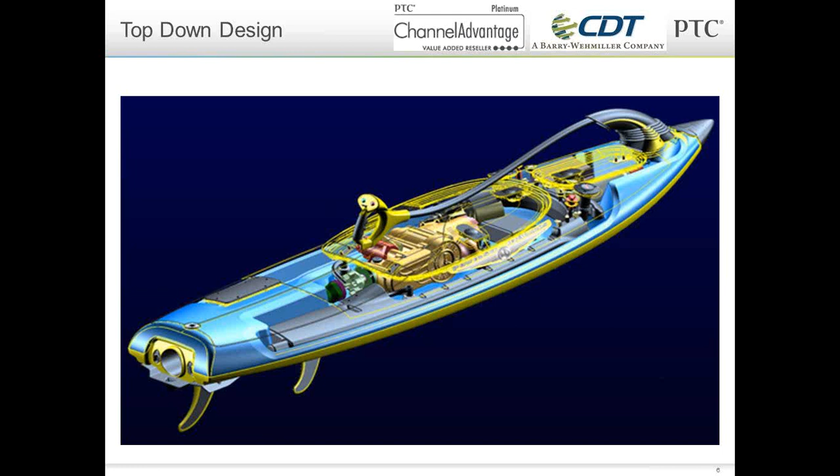Okay, so let's start by talking about top-down design. This is a perfect example. This little powered, I don't know if you would consider it a kayak or a ski board or a combination of the two. Looks like they took a kayak and turned it into something else almost. But this would be a very good example of something that you might use top-down design on.

With a lot of bottom-up design approaches, that is not the case. Let's say the other extreme would be working with Legos. I've got a 4-year-old and a 1-year-old son, so there's lots and lots of Legos around the house. When they're building a house out of Legos, where the roof is going to be is very dependent on how many stacks of blocks you put in.

Using a top-down design, however, I could specify a location where the roof would be and a location where the walls are, and I wouldn't have to know if I'm putting a green block or a blue block or any of that information at the time of designing the walls. I can do that later when I get to that portion of it. So it really has an emphasis on planning and a complete understanding of the system before you get into the small details.

Another really cool thing that top-down design allows us to do typically is it allows us to break a large assembly or a large design into separate smaller pieces that we can dole out to different teams. So in the case of the lawnmower, I might have one team working on the deck, one team working on the seat mounting portion, one on the frame, and then another team working on the engine and the transmission.

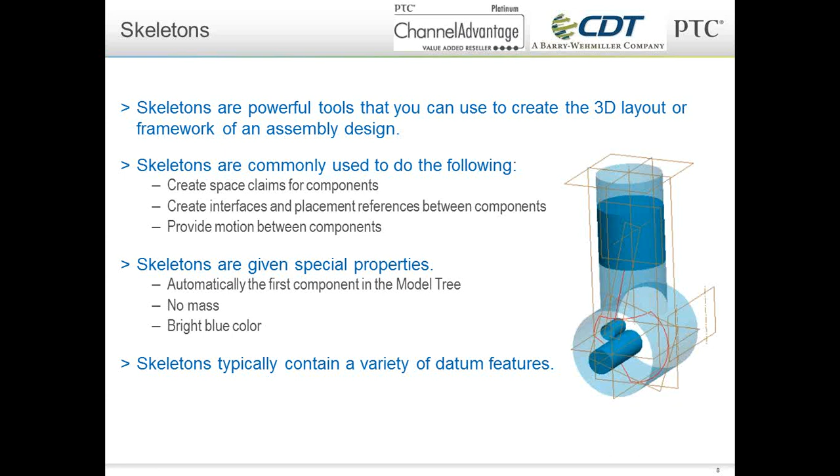Now you notice that there's a lighter blue associated with the skeleton defining the block. In this case, that's because it was actually given some transparency, so you can kind of see through it. And like it says down here below, skeletons are typically defined using different datum features, and a lot of times you'll see that they're not even solid geometry, they're just surfaces. So these 2 diagrams really show one of the most beneficial parts of skeletons here.

If you notice, on the left would be a traditional assembly. I've got, let's say, my piston, my rod, my crankshaft, and my block, A, B, C, and D. I've got component D and component C that are assembled to component B, which is assembled to component A. At any time, if I decide I needed a drastic overhaul of component B, or maybe delete it entirely, I wouldn't be able to do that without breaking some references.

Now, the cool thing about skeletons is it assembles everything to the skeleton. So if you look on the right, you'll notice that A, B, C, and D are all assembled to the skeleton and not to each other. So now I can complete one of these portions and not wait for the input from a different member of my team, and if someone makes a design change, then I don't have to worry about my portion of the design suddenly being moved to the wrong location or something like that.

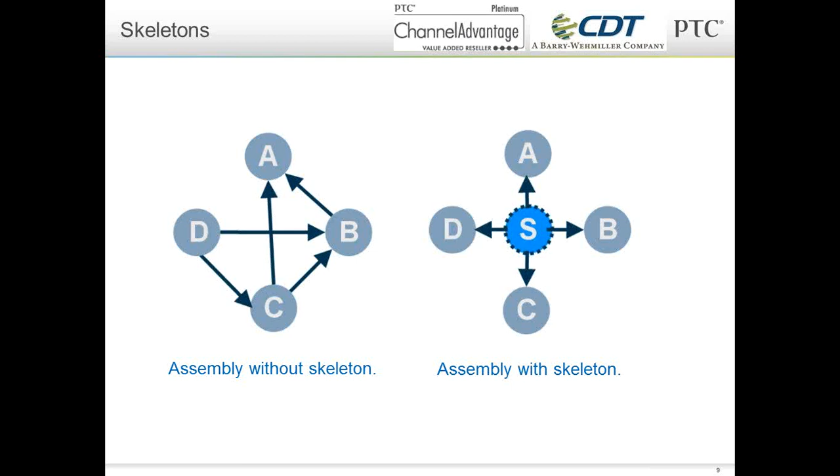Another little analogy I've heard is to think of a skeleton like a Christmas tree, and your design being all the ornaments and the Christmas lights that are on the Christmas tree. I don't have to assemble the ornaments to each other, even though I technically could, or the tinsel or whatever. The tree itself holds up all those ornaments. I can remove any of those ornaments without worrying about the other ornaments not being constrained properly.

So here's what we're on to now, the actual demonstration. We've gotten a lot of feedback from you guys in the past, and the one thing that's common is most people don't like the talking so much as the actual presenting of the software. So let's flip over to Creo Parametric here. And one thing I will note is that very little has changed in the Advanced Assembly extension between Creo 1 and Creo 2. So even though I did parts 1 and 2 of this Advanced Assembly extension using Creo Parametric 1.0, everything should work almost exactly the same in Creo 2.0.

So if you were looking to see what's changed from Creo 1 to Creo 2, I'll just tell you right now, not very much at all. So the first thing we're going to do is we're going to start and actually create an assembly using a top-down design approach. So let me first go in and we'll set my working directory to a location here that will allow me to create a few things. I'll make sure I'll start with a fresh slate.

So the first thing I'm going to do is I'm going to create a new assembly, and I'm going to name that assembly drill. I'm going to create a real simple drill. And we'll design this guy in millimeter kilograms. And you'll notice as soon as I start this, my model tree has nothing in it except for drill.assembly. I can turn on the tree filters. You can see that I've got some planes and a coordinate system that are in there, but those are really not going to be used a whole lot for us right now, so I'm actually going to turn those datum features off, which will allow us to see just the components and the other features that I add to this assembly.

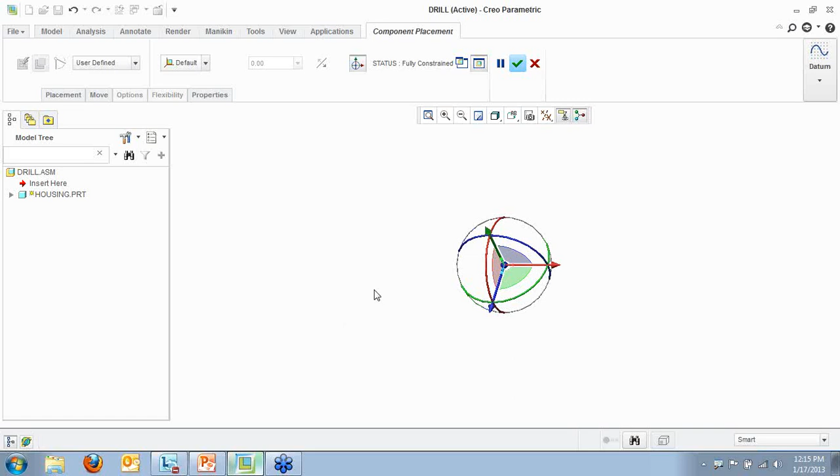So as soon as I drop that in, I right-clicked in the graphics window and picked the default constraint. You'll see that put a default constraint in here, which, as we all probably know, assembles the coordinate system of the assembly to the coordinate system of the component that I just inserted into the assembly. If I turn my planes on, you'll see I've got one component inside of this assembly. Then also within inside of this assembly, I want to insert several other components as well.

Let's say this time I'm going to do a sub-assembly, and we'll call this drivetrain. Because this drivetrain subassembly is going to contain all of the components, the motor and the gearbox and the chuck and that sort of thing. And I'm going to click OK. This time, however, I'm going to have to browse over to my assembly there, and instead of actually placing the component, because this component hasn't been defined yet, I'm going to leave this component unplaced.

Now notice when I do that, and I'm going to zoom in and show you a little bit closer view of it here, that housing and drivetrain, even though they're both technically an empty part and an empty assembly, they have different icons associated with them. So I can look at my drill.assembly, and I can see housing part I created. It is assembled. It is placed in the assembly. Whereas drivetrain I also created, but it's got a different icon associated with it to designate that it is not actually assembled, or it's not actually placed into the assembly.

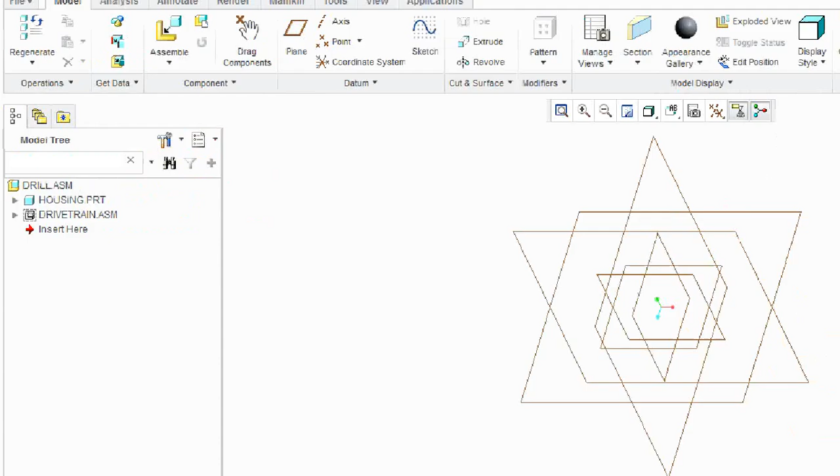Then one thing I'm going to do is I'm going to also create a trigger mechanism for this. So we're going to actually create this as a shortcut. We're going to say trigger and create this as one single part. We'll also leave this component unplaced.

And let's say that I need also to include a battery on this. So in this case, I've already got a battery that's designed somewhere, but I don't want to place it yet, so instead of creating a new component, I'm going to go to the drop-down under Assemble, and I'm going to say Include. In this case, I have a battery pack that is located in this next folder over here, and when I do that, it drops the battery in the same way, unplaced in the assembly.

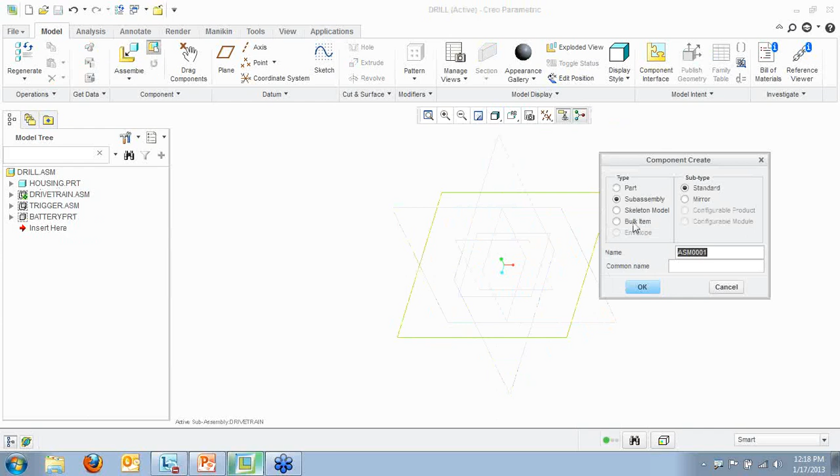Well, you're saying, oh, inside the drivetrain, I've probably got several components. I don't have to open an empty drivetrain assembly and insert several components there. I can simply grab that drivetrain assembly and activate it and create those components in there. So let's say inside of that drivetrain, I'm going to have a motor.

Also leave that component unplaced. We'll browse over to the part file there. And then if you expand this out, you can see I've got a motor inside of there. I'm going to also place, let's say, a sub-assembly of a gearbox inside of there as well. Then I'm going to place a sub-assembly for the chuck.

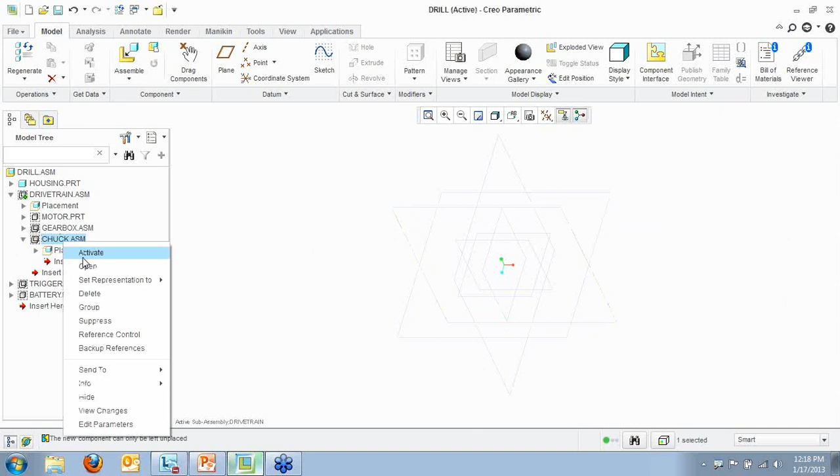And then I can go even further into that. I can activate chuck assembly, and I can go in and go as far as to insert components inside of there. So, chuck collar. Oops. And don't worry, I'm not going to go as far as to create an entire large complicated assembly, but this is just to show you how I can quickly and easily, we'll go back and activate our base assembly, create the entire assembly of an entire component here using this.

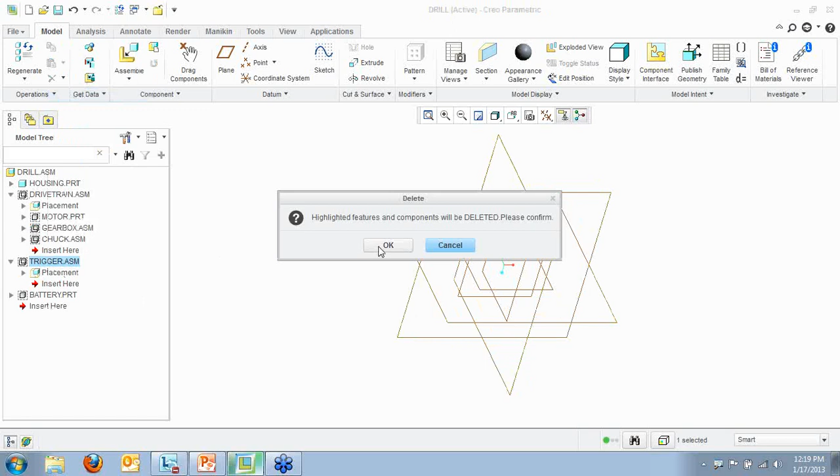And I messed up the trigger, so we need to actually delete that. We'll actually create a trigger.part. So part this time. Part, leave component unplaced. So the first thing we're going to do once we've created this entire system is now, since we're talking about skeletons, we're going to go back and create a skeleton to give us those placement space claims and the placement references where we're going to assemble things to. We're going to define all of that using our skeleton.

So the first thing I'm going to do here is go and create, and this time instead of creating a part or an assembly, I'm going to pick a skeleton model, a standard skeleton model, and we're going to label this one drill_SKEL. And you'll find most of the time people consider this to be good working practice, that when I use a skeleton part or skeleton sub-assembly, motion skeletons or standard skeletons, you use the same terminology of the components you're basing the skeleton off of, but you make sure and put an _SKEL, which allows you to quickly and easily, from looking at your model tree, determine which of those components is the skeleton. So I'm going to say drill_SKEL, and I'm going to click OK.

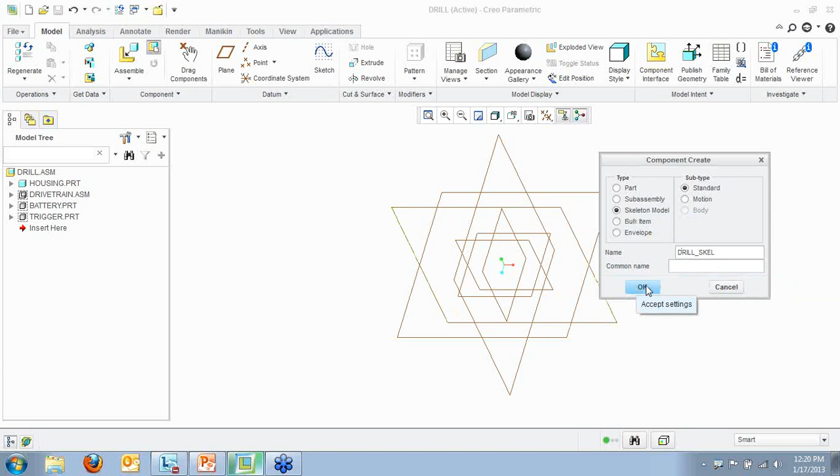And it's going to ask me how I want to place this and all of that information. Again, I'm going to do a millimeter kilogram second part.prt. And notice that it placed my drill skeleton right directly at the top of my model tree. Even though I already created things, the skeleton parts are always going to be at the top. When I expand this out, you'll see there's nothing inside of it. I'm going to actually open this in another window and create the base for this drill.

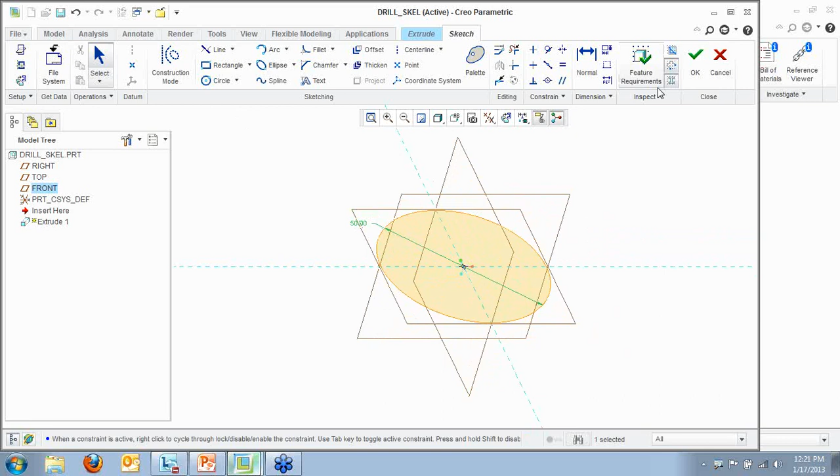And we're going to do that using traditional modeling features, only instead of using solids, I'm going to use a lot of surfaces instead. So I'm going to first click extrude, and I'm going to extrude from the front plane here, and I'm going to put a simple circle of diameter 50 millimeters. I want to complete my sketch, and you'll notice it automatically toggled to a solid. In this case, I want to make it a surface. And I want to extrude 100 millimeters in one direction, and I want to go to side two and extrude 50 millimeters in the opposite direction. Notice the blue color indicating this is a skeleton part.

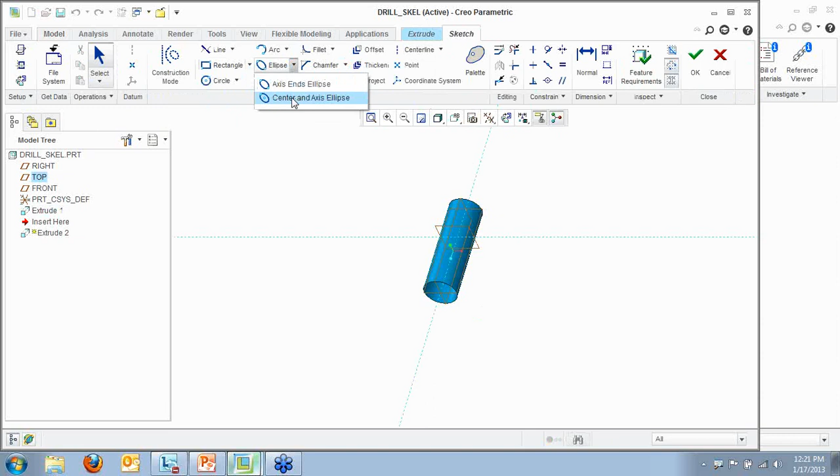Next, I'm going to add another extrude. This time we're going to extrude from the top plane instead, and I'm going to use our handy-dandy center and axis ellipse tool to start from the center, and we'll say 45 millimeters long by 25 millimeters wide. So that'll give us a nice, somewhat ergonomic grip. Again, toggle this to a surface. I'm going to flip the direction the other way, and in this case, I want it to go 100 millimeters.

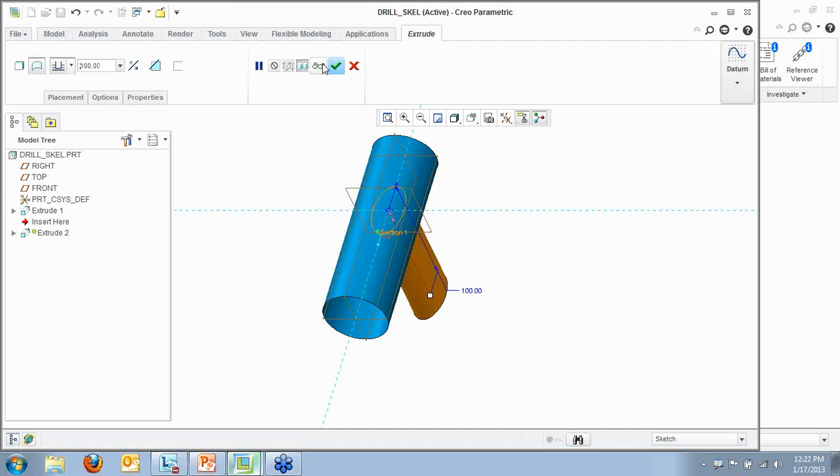While I'm in here, you'll notice that I've got two things. I've got these two surfaces that are intersecting with each other, and to show you a little something slightly off topic but very much related, I want to take these two quilts. So I'm going to select both extrude 1 and extrude 2, and I want to merge them together. When I merge them together, it's going to ask me which sides I want to keep, so I want to flip my arrows to designate the two different sides that I want to keep.

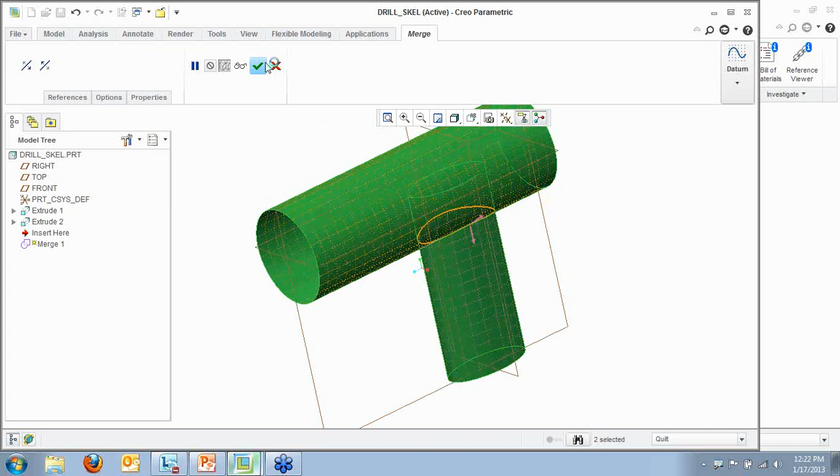I can also do that up here with the arrows here. Notice when I get the orange wireframe, or I guess the orange almost shading grid on the parts that I want, then I will complete the feature. You'll notice that now it trimmed out the other portions of that, and now this is one quilt that can be selected as an entire single quilt.

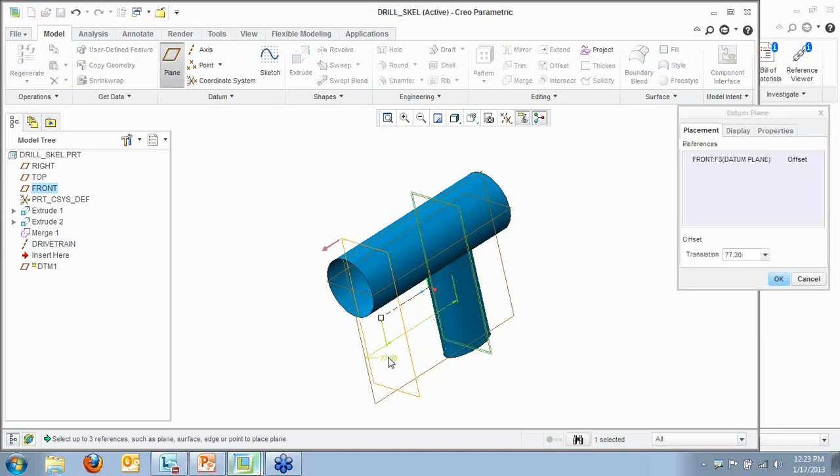Well, there's a few other things I want to do in here: I'm going to create placement references. First of all, I want to create an axis that goes through the center of this quilt, and I want to name this drivetrain, because that is going to be the axis that I'm going to assemble my drivetrain to. Maybe I want to put a plane offset from this out, we'll say 75 millimeters, and I will label that plane chuck, because that's what I'm going to assemble my chuck to.

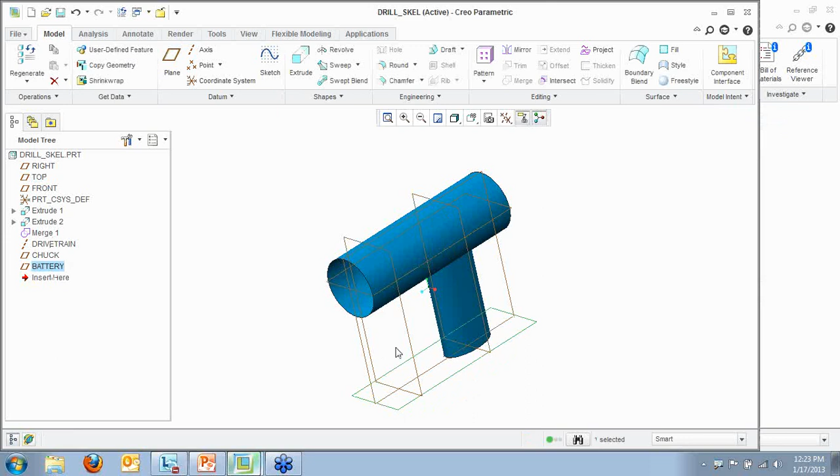Then maybe I want to put another plane down from the bottom. Let's see, we'll go from the top plane down 100 millimeters, and we'll label this one battery. And that's going to allow me to have a reference to assemble my battery to. We won't go and actually assemble the entire drill and create an entire drill from scratch. We only have an hour, so obviously that's probably not realistic in this time frame. What we do want to do is focus on the trigger.

So we're going to put an axis in, and with that datum axis tool selected, I'm going to also create a plane offset from this top plane down 50 millimeters, so I'll say minus 50, and I'm going to put my trigger axis through there and through this plane here as well. And we're going to label this one trigger.

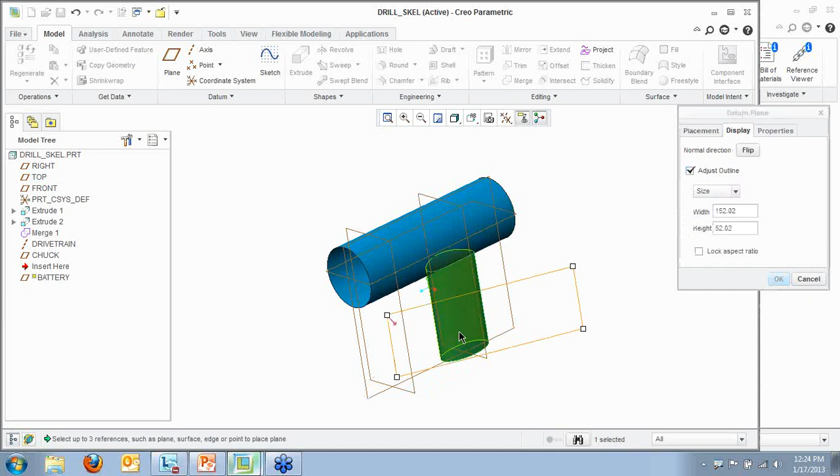And let's change some of these around. Maybe I'm going to grab that battery, and I want to edit the outline of this battery. Oops, let's see here. Adjust the outline, not off of size, but off of reference. Now let's cancel out. I just made a mistake there, so don't do that. I'm going to edit the definition. I'm going to go to my display. I'm going to adjust the outline based off of a reference, and for my reference, I'm going to pick this surface. We'll hold down Control.

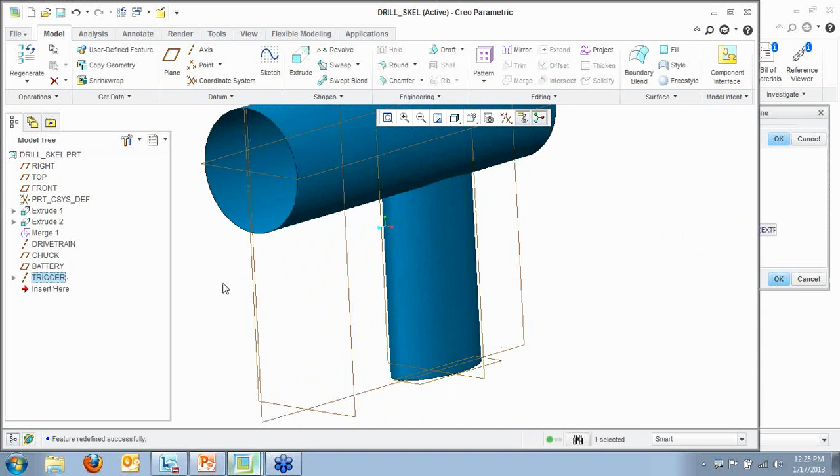Maybe that's as far as I want that to go through there. Or my trigger, I don't want it to be through the entire part. So let's turn on our axes here. I want my trigger only to be through that portion of the assembly. So I can edit the definition of the trigger, display, adjust the outline based off of a reference, and I'm going to pick that same reference there.

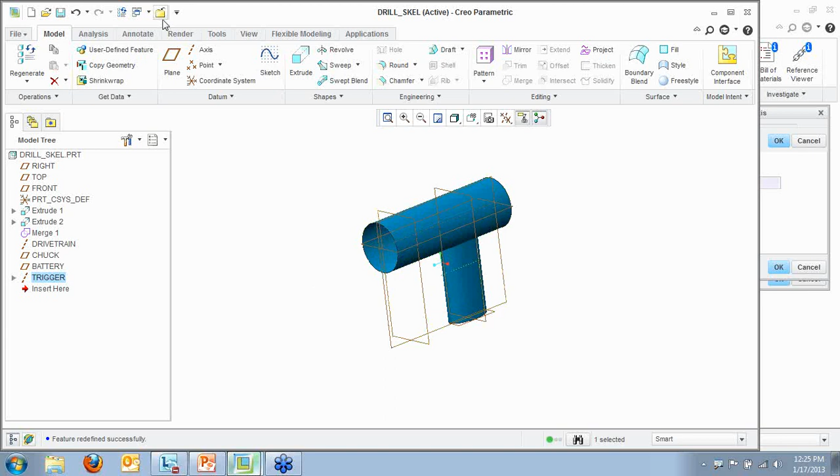Again, tips and tricks. We try to show you a few cool little things spread throughout, so that if you're not necessarily interested in skeletons, you might still be able to learn a couple of other things. So now I'm going to have those things that I can come in and assemble there. Let's save this guy and close out of here, and you'll notice that now I've got the skeleton that I created located inside my drill assembly.

Well, I want to also create a trigger on this, and I'm going to show you two different things we can do here: one being where I take an existing model and create a skeleton from that, and then how to take a skeleton and create a model from that. So we're going to do something that doesn't logistically make sense in this specific application.

I'm going to create some geometry. I'm going to create a skeleton from that geometry, and then I'm going to use that skeleton to actually generate part geometry. So I'm kind of taking the long way around to show you two steps. Just note that this isn't necessarily realistic of the way that you would do this in the real world, but I want to show you two pieces of functionality built into one.

So the first thing I'm going to do is go in and create a new part, and we're going to call this part trigger_geometry. I don't want to use the part template; I want to use my millimeter again. Here I'm going to create a couple things. First of all, we know that we need an axis for our trigger, and we need the geometry to actually create the trigger. So I'm going to first drop an axis at the intersection between the right plane and the top plane. We're going to name that axis trigger.

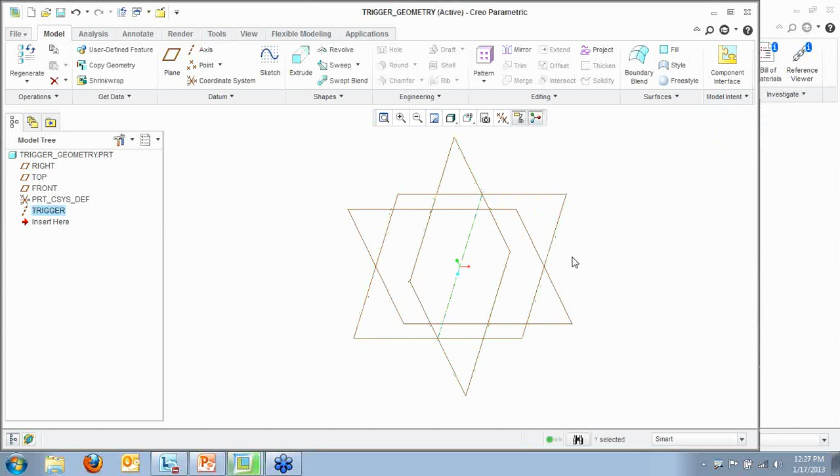And then I'm also going to create an extrusion on the right plane. In that case, it actually turned the wrong way, so I'm going to hold down Control and rotate this 90 degrees to the right.

Just to verify that this all popped in correctly, let me turn my planes off for a second, and let me make sure my axes are turned on. I'm going to pick trigger axis to make sure—there it is, it's horizontal, that's the way I want it to be.

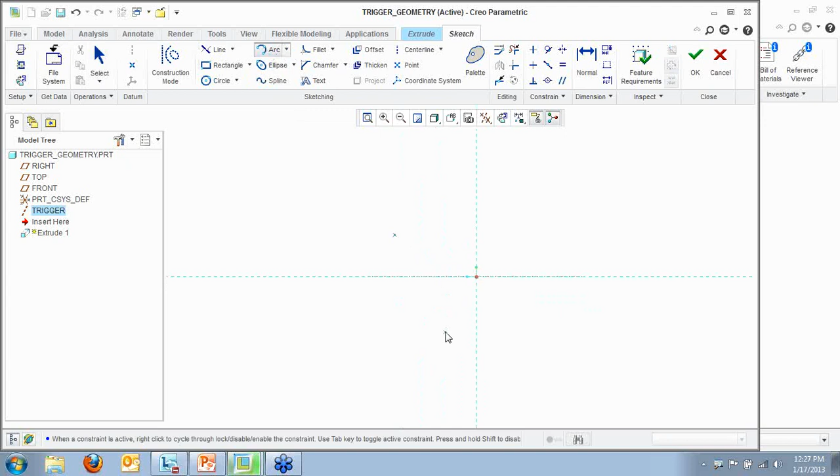And I'm going to create some geometry, just a simple 3-point arc. We'll start here, come down to about here, and we'll make it about like that.

Now, I made it in millimeters. This is 77 millimeters off of the front plane. That's probably not desirable, but I'm going to show you another little trick here.

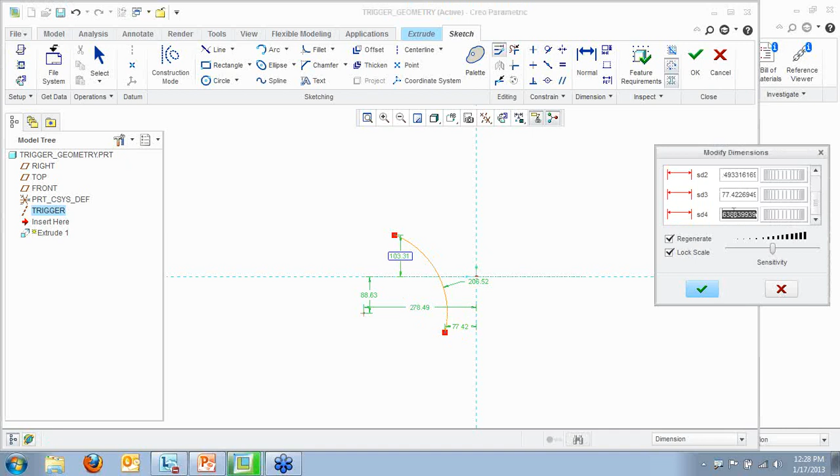I'm going to select all of the geometry, go up to my Modify tool, and check the box that says Lock Scale. Then I'm going to come in and say, for example, I want this top dimension here—if I scroll up, I should see it highlighted right there. I want that SD4, in this case, to be 25.4 millimeters off of the horizontal. Notice how it rescaled everything for me.

So just like we always know, sometimes when you drop that first sketch in, it comes in as 1,000 millimeters instead of 4 millimeters like you're wanting it to be. We can use that Modify Dimension tool to rescale things appropriately.

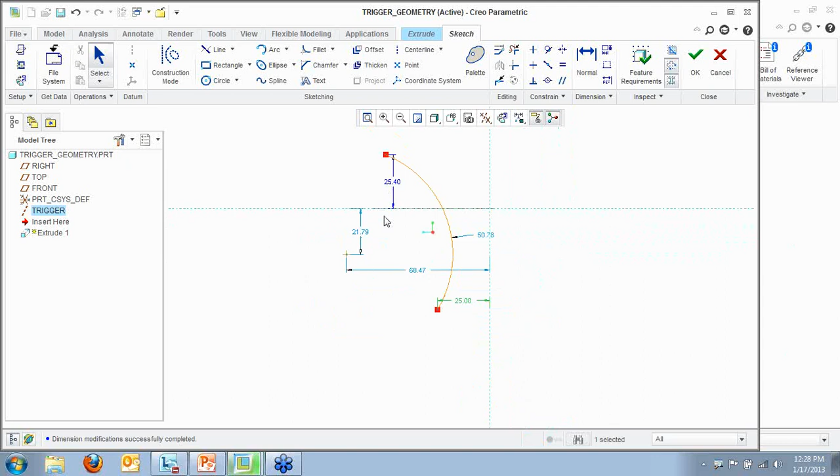And now I can come in and tweak these individual dimensions a little bit. Maybe I want this one to be not 19, but we'll say 25. And we want this other dimension here to be 75.

That's close enough, and here's another little trick I'll show you. Because under my extrusion I have this currently selected as a solid, when I complete a sketch that does not contain a closed loop, if I go to my feature requirements, you'll notice not all ends have been explicitly defined.

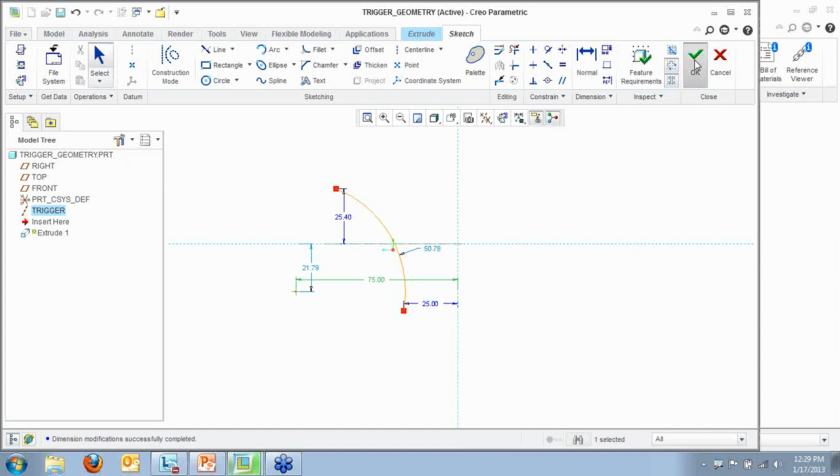When I complete this sketch, I'm going to get a warning: there is no solid geometry in the model to intersect with this feature, therefore the sketch must be closed. If you continue, the feature type will automatically be changed to surface. In this case, I want a surface, so that's what I want—I'm going to click OK.

If maybe I wanted to do a thickened instead, I could toggle that back to a solid, and it would automatically toggle to a thickened—let's say 3 millimeters thick.

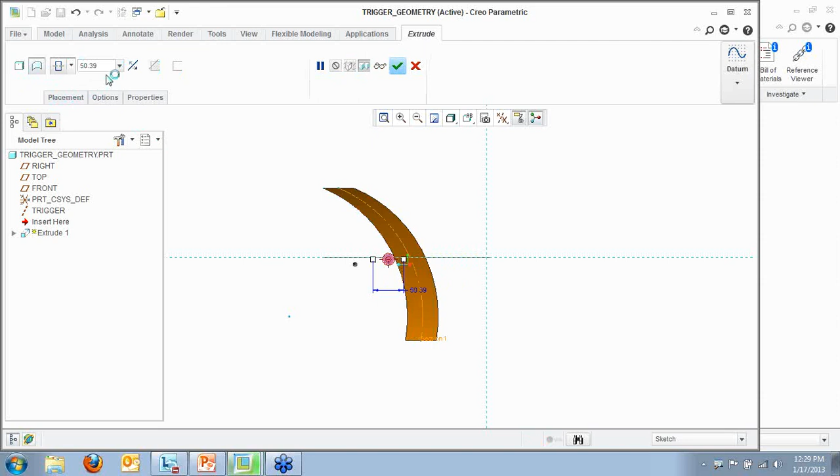But in this case, I actually do want it to be a surface, and I'm going to do a symmetric extrusion of 25 millimeters wide, and that's going to be the geometry I'm going to use to create my sketch. I'm going to click OK, and you'll notice I have a purple surface.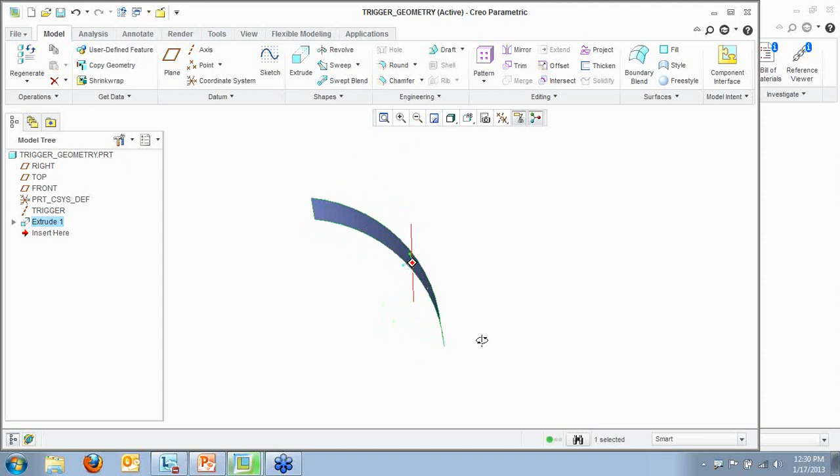Again, in Creo, since Creo 1 came out, surfaces and solids show up in different colors. Solids show up as gray, like we're used to. Surfaces and quilts show up as this kind of purplish—I guess my wife would call it periwinkle. I'm not good with colors, just like most guys aren't.

But I can tell right away this is a surface. So now this is the geometry I'm going to use to create my trigger. I'm going to save this, and I'm going to close it.

And I'm going to do something that I don't know if a lot of people would consider good practice or bad practice, but I'm going to have to change a configuration option. I'm going to insert multiple skeletons inside of this assembly. This is a simple enough component that I probably wouldn't need to do this in the real world, but just to show you how to do this, I will go ahead and do it.

And for very large assemblies, which I'll show you one here in a little bit, multiple skeletons within an assembly will be very, very valuable to you.

So you want to go to your File, Options, and under your Configuration Settings, when this pulls up here in just a second...

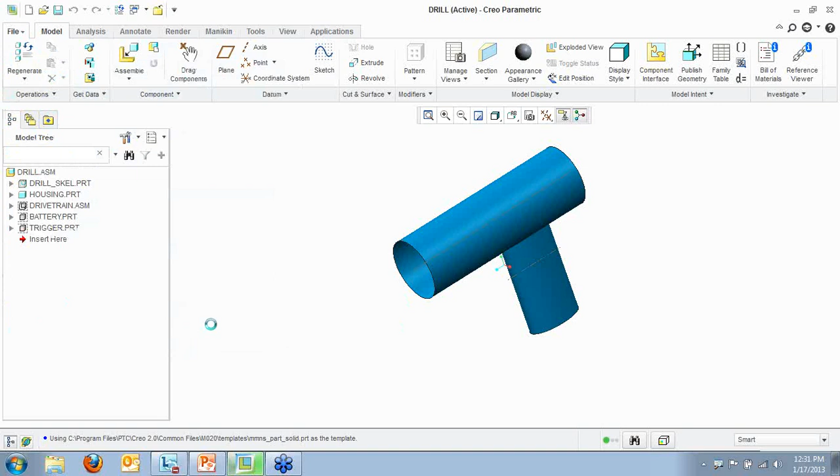Oh, no. Okay, so that's never happened to anyone else before, has it?

Okay, so let's go in and we'll open this guy back up again. It wouldn't be a good demo unless we crashed Creo at least once.

So let's retrieve this, and fortunately, let's see if I actually go back to my favorites. I did not save that assembly. So let's go in, and fortunately I do have another one located here that is completed. Notice when I try to open it, I get an error telling me I have an invalid skeleton component.

So this is a good point to show you: if I go to File, Options, Configuration Editor, I need to find 'multiple skeletons allowed,' which you probably won't have. Type in 'multiple' and click Find Now, locate 'multiple skeletons allowed,' and change this to Yes. Click Add Change, then close. Notice that will allow me to put multiple skeletons within an assembly.

Note that I personally have this listed under my favorites. In this current configuration I'm running, I have just 5 different favorites: Sketcher starts in 2D if you like the old Pro-E of snapping back to 2-dimension when you start a sketch, whether or not I want to display tolerances, multiple skeletons allowed, show interference in sections, and auto add remove. So multiple skeletons allowed, I want to make sure that's checked to yes. No, I don't want to save over my config file.

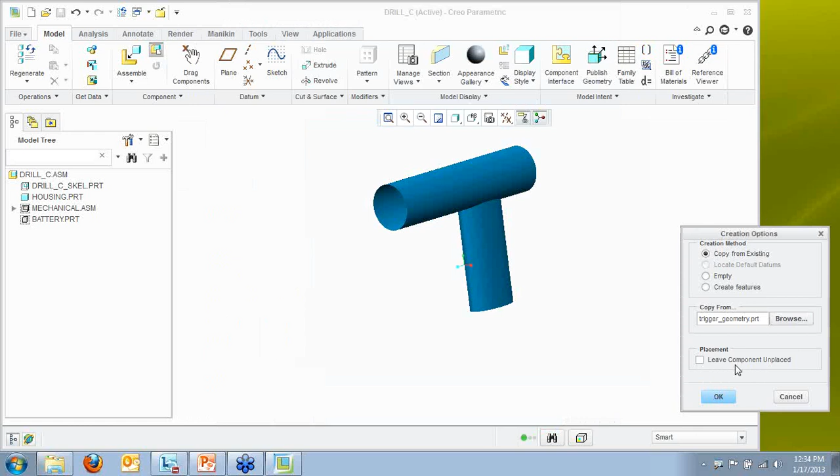Click OK, and I'm going to say copy from existing, and instead of importing geometry like I could do, one option is to browse over to that other trigger geometry we've created and open that. In this case, we don't want to leave the component unplaced, we want to actually place it. So I'll click OK to place this into the assembly.

And I want to turn on my planes and my axes here. I'm going to grab this axis and assemble it to that axis there. Then I'll add a new constraint, pick this here, and we'll open this in another window so it's easier. We're going to make that coincident with that there.

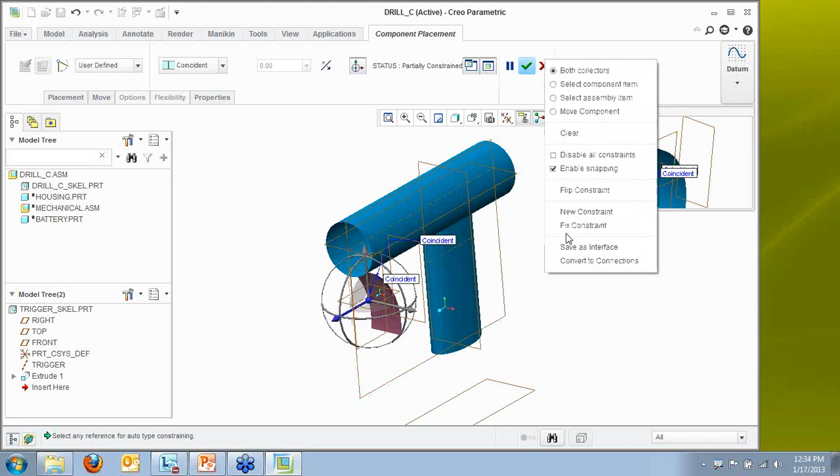Add another new constraint, and we're going to pick this front plane and this front plane here and get those pretty close to each other. So you're probably noticing, yeah, that's a very big trigger. That's probably not going to meet my design intent. Don't worry, we'll take care of that in just a moment as well.

But now I've got two skeleton models inside of my assembly here. So I want to go into this trigger skeleton and actually create a new part. I'm going to create another new part, this time a regular part, and we're going to call this one trigger.

And I'm going to browse over to my regular part geometry, and leave this component unplaced as well. I'll show you another method of doing this. Oops, I meant to leave that unplaced that way.

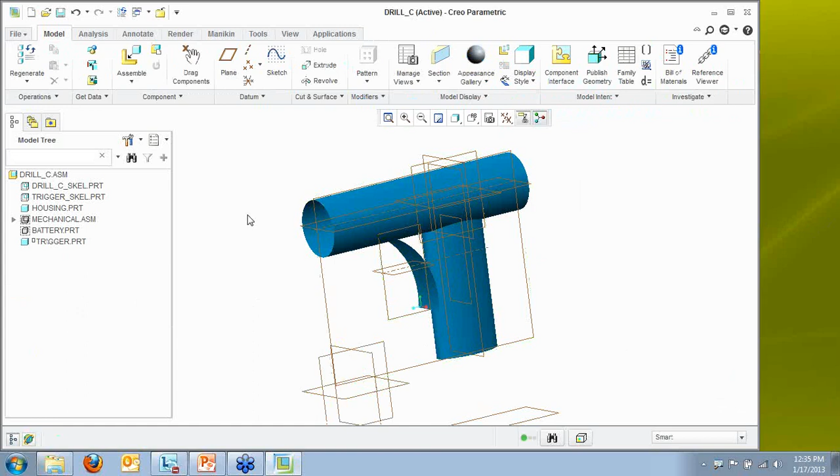If I open this component and go to copy geometry, I'm going to be allowed to reference that existing skeleton model. So I'll open that, it's probably in the other folder here, in session, that trigger skeleton, trigger skeleton.prt. When I do that, it's going to ask me for my placement references. I want to place it, and the easiest way to do this is using coordinate systems.

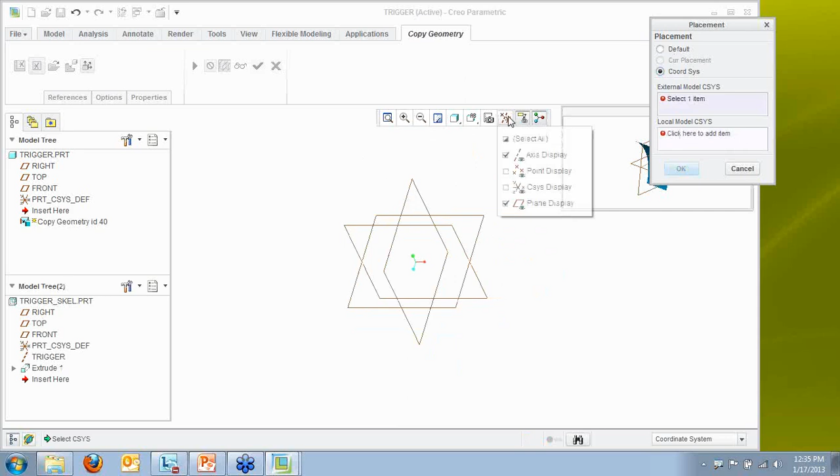So I'm going to pick coordinate system, and I need to turn my coordinate systems on using my in-graphics toolbar. I want to pick the coordinate system of the skeleton and then the coordinate system of the component, and that should fully place the component with reference to the skeleton.

Then it's going to ask me to pick what portion of the skeleton I want to keep. This is very important here. You want to uncheck the box that says publish geometry only. I want to turn that off, and then select which portion of my skeleton I want to keep. So surface sets, I want to pick this surface, the trigger surface.

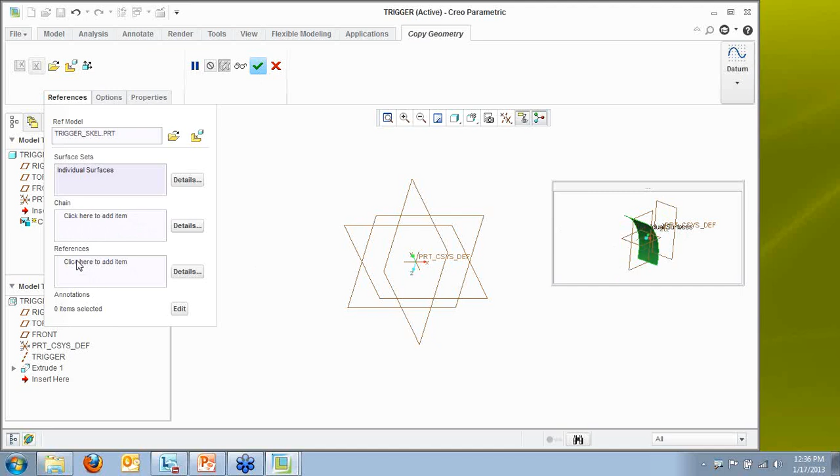I don't have any chains in here to pick. If I had some sketches that I wanted to bring over, I'd do that in the chain section. Under references, I want to make sure I pick that axis for my skeleton as well, my trigger axis, so that I have a trigger axis located in the part itself. Then I'm going to click OK.

Notice now I have an external copy geometry feature in my model tree, and I want to use this existing geometry to create some solid geometry. So the first thing I'm going to do is toggle over to quilts, pick this quilt here, and thicken my quilt. We'll say I want to give it a thickness of 3 millimeters, and then complete that feature.

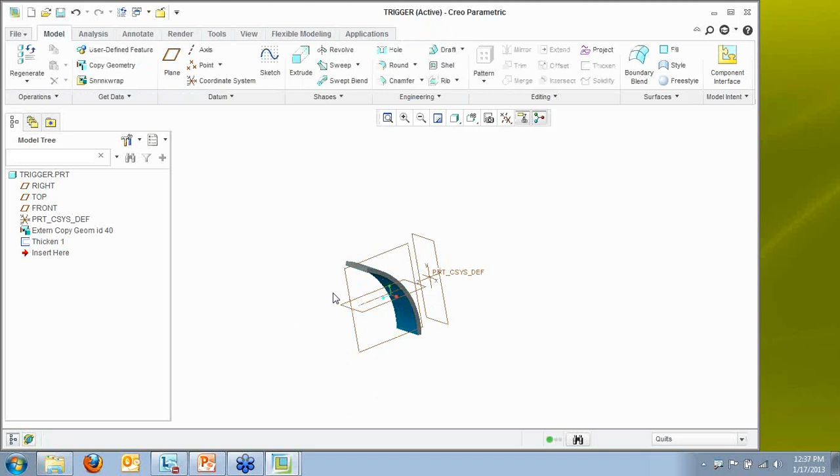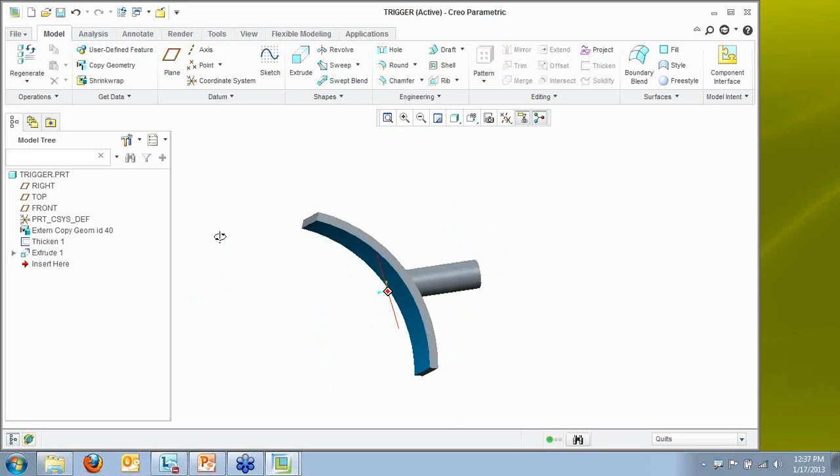Then I want to create an extrude based off of this front plane, and I'm going to do a circle, maybe 10 millimeters, a little bit bigger. I want to extrude that circle to this surface, so I'll say to selected, and pick the back surface of the model here. That way I've got a good parametric definition that it's always going to go from that plane to the surface, and I can define the length of this based off of the existing skeleton.

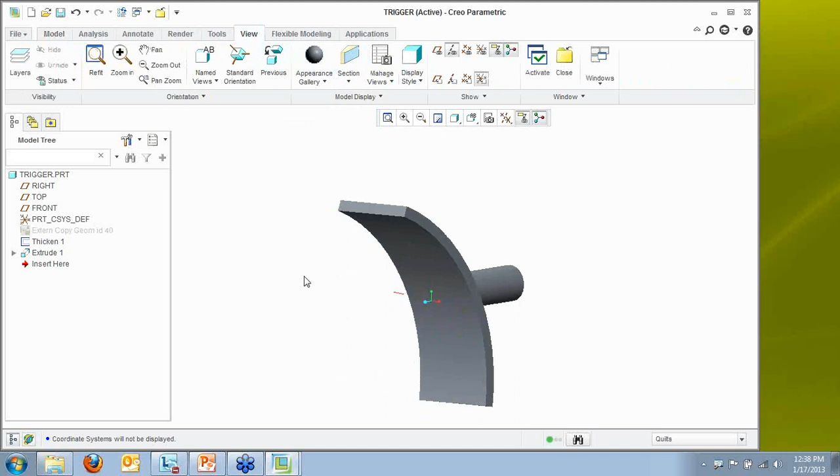You'll notice that I've got my solid geometry, but then I've got this blue geometry on the front here as well, probably wondering what that's all about. Let's go in here and grab my copy geometry and hide it. Then I want to go back to the existing gray color for that front surface as well, and then save this guy and close it.

Now you'll notice this is placed over here. I want to now assemble this. This is one method of doing this. I want to assemble this based off of the existing axis. Or even better, in this case, let's remove that and base it off of not the axis but...

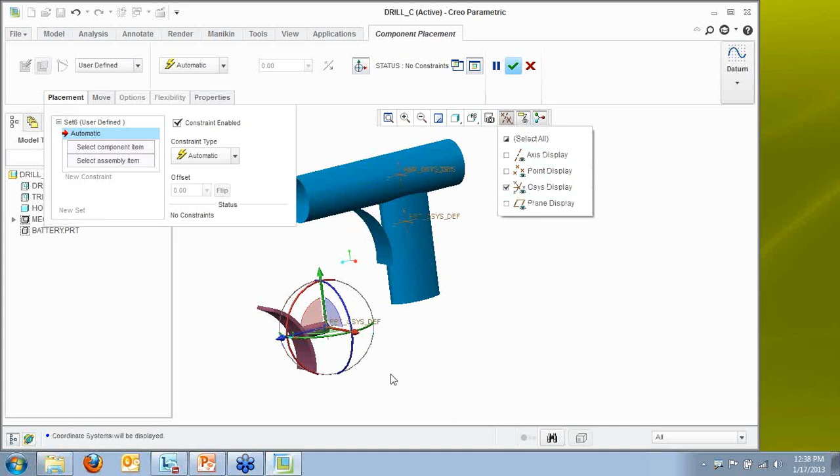...the coordinate system of the skeleton that we created this from. So I'm going to grab my coordinate system here and my coordinate system here, and then it will remain tied to that skeleton at all times.

Now notice once I do place this, you'll get that little graphical jagginess of those two surfaces that are different colors occupying the same space. And you're probably wondering, what in the world is this guy doing? This trigger is absolutely horrible. No matter what kind of drill we're going to design, this trigger is not going to be usable.

Well, let's say that my overall design person has the ability to edit the skeletons, but no one else does. So that way he can come back in and change just the trigger skeleton. Let's say he'll activate the trigger skeleton, and turn on our features so we can see what we've got going on inside of the trigger skeleton.

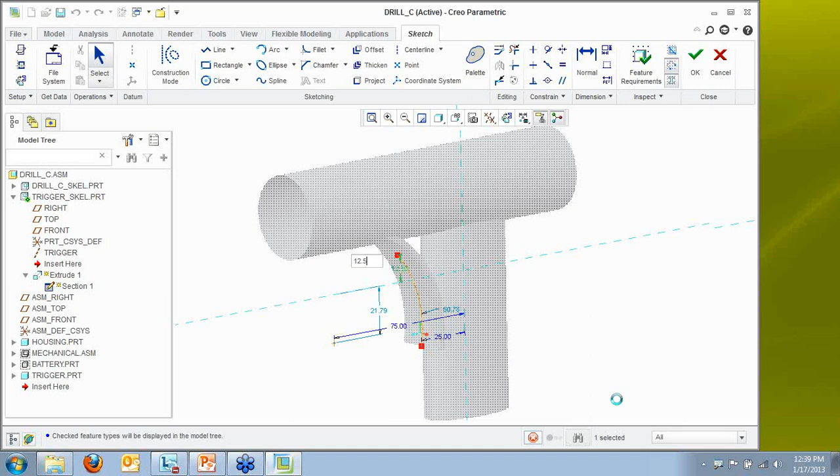I'm going to grab this one sketch in here and edit the definition of it. Let's bring this down from 25 to, let's say, 12.5. We'll bring this bottom up here just a little bit, drag it to about right there, maybe drag it out just a little more. Somewhere about right there looks better.

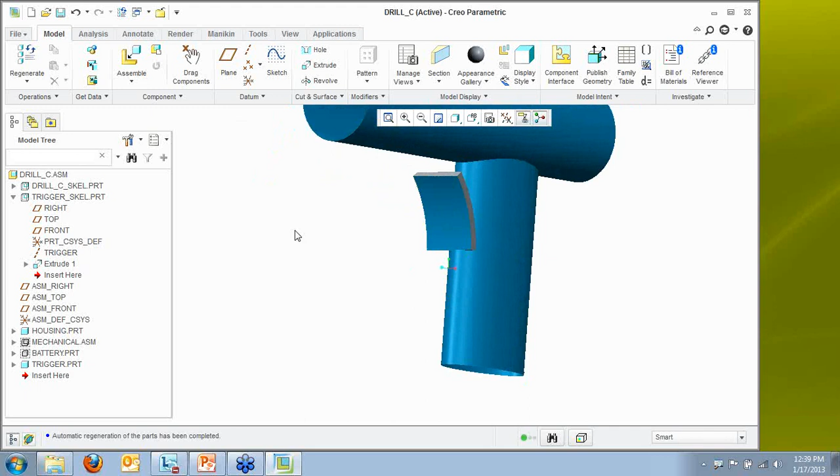And then complete my sketch, and I'm going to regenerate. Let me activate my base assembly first and regenerate. You'll notice that the geometry that was created based off of that has now been updated appropriately to match what I did there. I could go back and do more, changing the width as well.

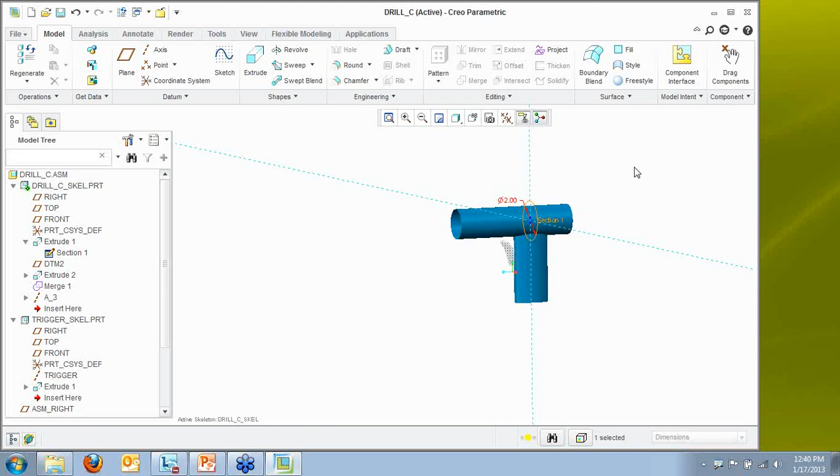This allows me to come in and make pretty large design changes, where I can activate the base skeleton and modify the depth of an extrusion, or the diameter of a sketch, say change this from 1.5 to 2 inches. This one was designed in inches; the other one I was working on was designed in millimeters. I can see that if I tie things appropriately to this, everything's going to update accordingly.

So that's a very simple way to not only use skeletons as reference placements, which I have the planes located in here to assemble my battery, to assemble my chuck and collar to. I've got my axis through the middle to assemble my drivetrain to. I've got my trigger defined here. So that's my placement references. I've got my space claims.

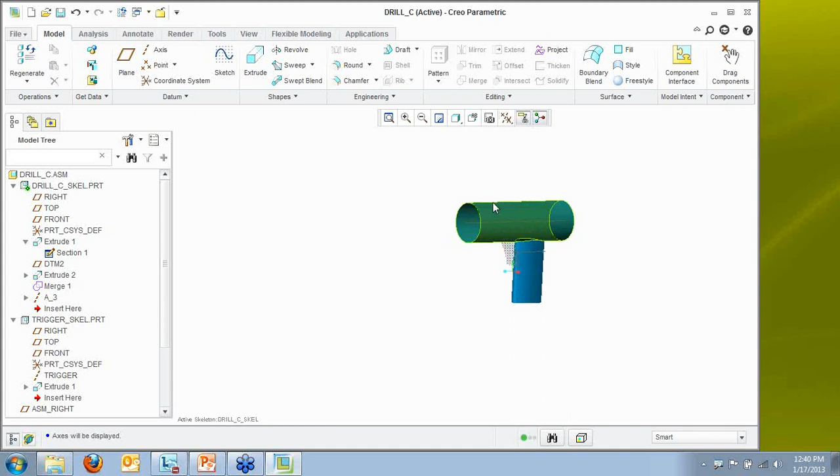I can come in and I can use this skeleton housing. I can give this to one team and tell them to design the drivetrain, and it has to fully fall within inside the surface. Then I can give the same skeleton to another team and say, I want you to define my housing, but it has to fully fall on the outside of the skeleton.

Now, obviously, it's going to be a little more complicated than that. Putting a motor inside of a drill, it's going to be a little more complicated than a cylinder, which brings me to another really cool thing that I can show you guys. I'm going to close this and erase all this and free up as many system resources as possible. And I'm going to open up another model that I've got under here under my favorites. I've got this mower assembly.

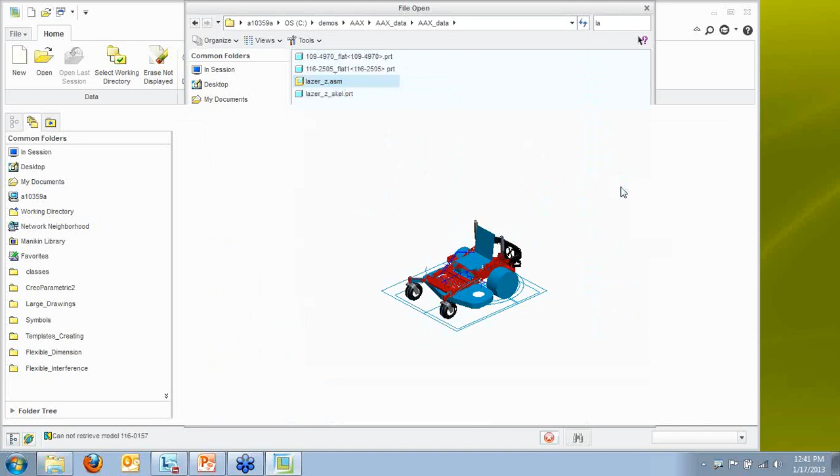And this is a company that uses Pro Engineer. This is a very large assembly that was built using skeletons. And I may or may not have enough RAM to pull this up and use it well, which I'm not going to make any modifications to. I'm just going to show you how this is built in the real world, how people in the real world use skeletons to define large assemblies and break it up into different groups. But I should have enough system resources to do that.

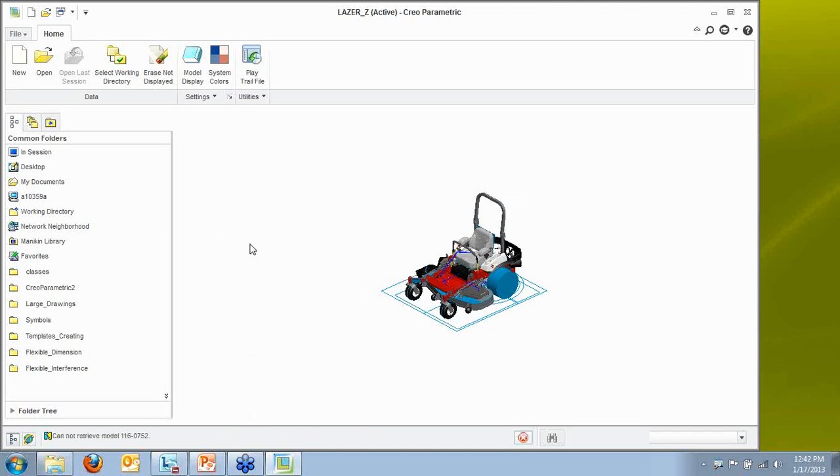So you'll notice here in just a second when my model tree refreshes, I did get a couple of errors. I am missing a couple of components that are not referenced in here, but that's okay. I've got this very large lawnmower assembly. You can see all the blue surfaces. Those are all of the skeletons. If I actually go in and open this skeleton part, then you'll notice in this case that they have their part number. Instead of putting an underscore SKEL, they just put SK at the end of the part, so that's another methodology.

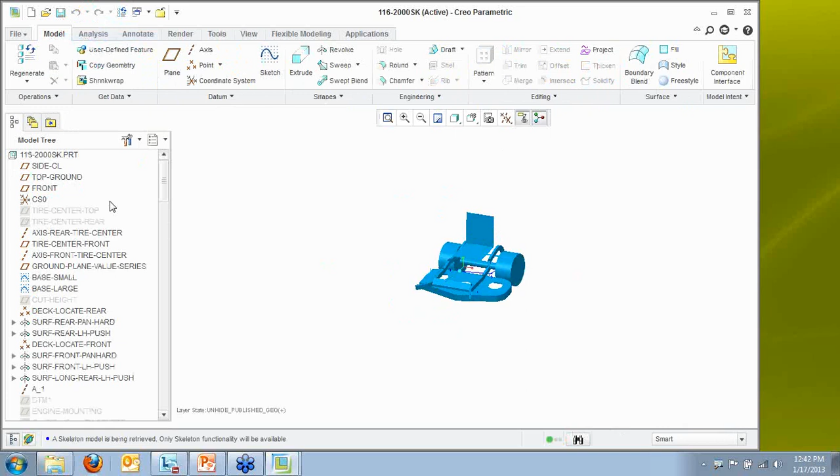You can see here are all the different portions of my skeleton. I've got where my seat's going to be assembled to, where my rear wheels and my axles are, the different frames. I've got my mower deck here. And let's say, for example, I wanted to go in and make an edit to this. Let's grab this component here and locate it in the model tree. And that's going to give me, let's say, my frame somewhere right here. Let's grab this sketch, and I can edit the definition of this sketch.

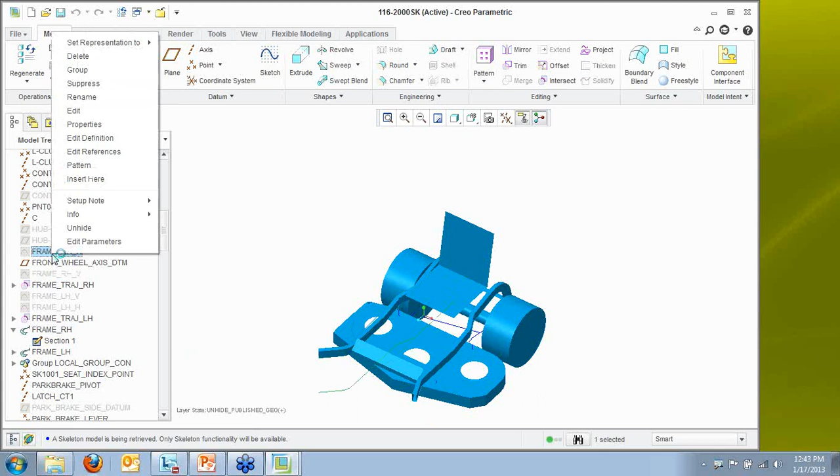And you'll notice that I can change from 7.8 to 12. And then when I come back and regenerate this, you'll notice that my skeleton also got longer. You may not have noticed how short it was before, but I made it just about 4 inches longer. And then when I came in and regenerated this, you can see there's the difference in the skeleton. If I regenerate this assembly, it will grow to that location.

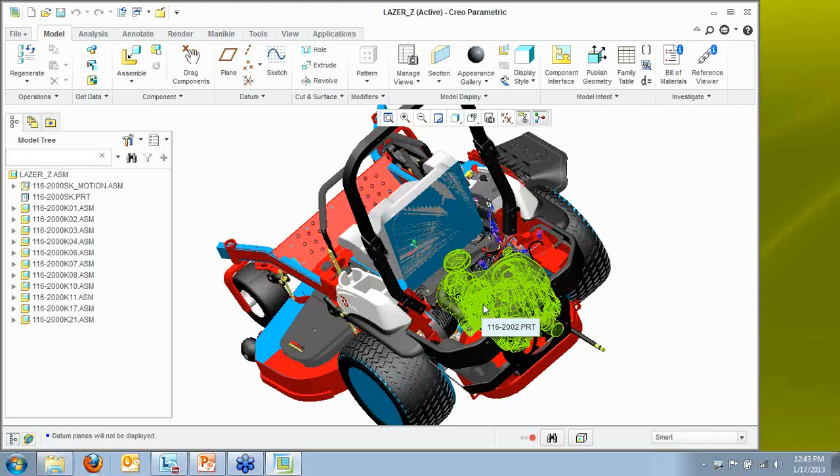Now I'll tell you from experience, if I try to regenerate this assembly right now, it will crash because I'm missing some vital components that the manufacturer didn't send over with the demo. But you can see this is a very, very large, very complicated assembly. It's got a lot of different components in it, and if we did this like a lot of companies I've worked with and worked for in the past, you'll have people making the excuses, well, I need to design the front tires, but I can't do that until we get the frame designed, and they can't design the frame until they figure out how big the motor needs to be.

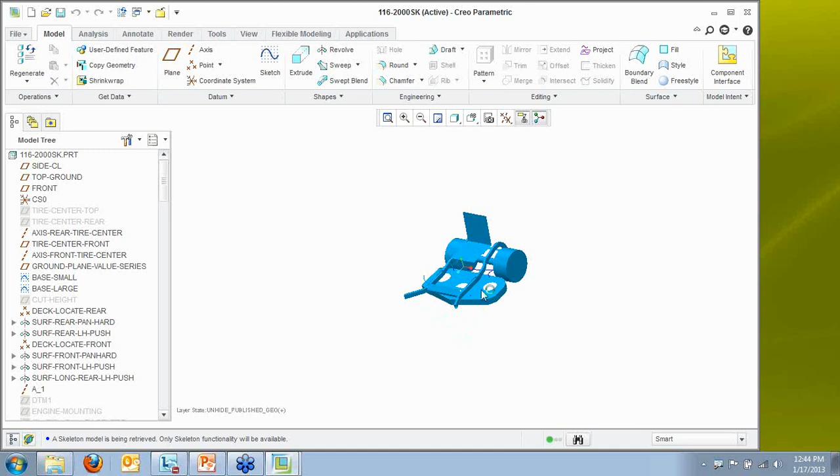Well, if I've got a skeleton, I can define exactly all of those references. Here's where the wheels are going to go. Here's where these wheels are going to go. Here's where you put the seat. And this can be modified later, but it gives us a starting point. So now I can have people come in and start designing the mower deck based on where it's going to fit in here.

And you can do a lot more complicated things with this, even dynamic analyses. There was a good demo showing mechanism analysis of how far the mower deck is off the ground in relation to how far this pedal is pushed down that raises the mower deck. And those get into some really cool things that can be done as well. So let's get all those out of my memory there to free up some system resources.

And there's one more thing I want to show you, motion skeletons. So first of all, let's go in under my favorites here again, and we're going to open up a cool little mechanism I've got designed here. Now first, I'm going to go in and set our working directory over here so I can make sure and keep all these things in the right place. I'm going to create a simple 4-bar linkage using the motion skeleton.

So I'm going to start by creating a new assembly. We're going to title this one 4-bar. And I'm going to not use the default template. I'm going to use my millimeter kilogram seconds, and I'm going to use kind of the same methodology, only instead of designing all of the components first and then coming back and defining all the skeletons that attach to that, I'm going to start by designing my skeleton.

So I'm going to pick my skeleton model. This time I'm going to pick motion skeleton. And here we're going to say 4-bar underscore SKEL. Click OK, and I'm going to browse in my working directory. Notice this time it's giving me the assembly, whereas the standard skeleton gave me the part. This time it's going to give me assembly instead. And notice it drops right in there.

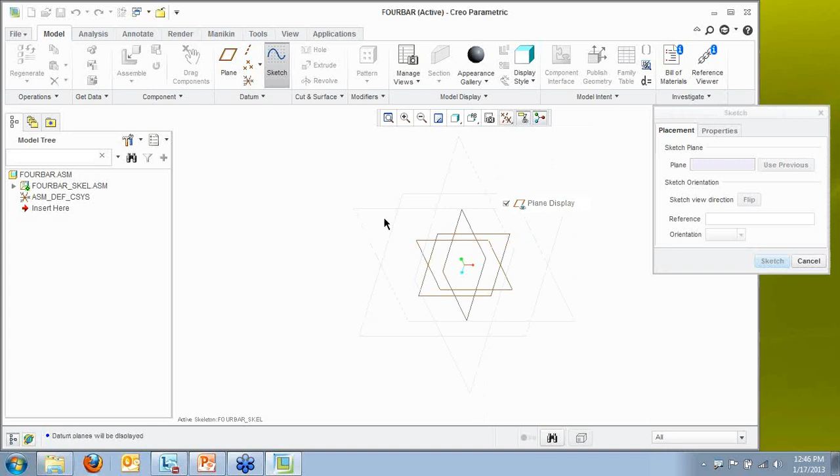I'm going to turn on my tree filters for my placement here, and I'm going to turn off all of that so I can see what else is going to go in here. So I'm going to activate the skeleton, and I'm going to create a sketch on the front plane. So let's turn on our plane here. Let's grab that front plane. And I'm going to create a really simple 4-bar sketch. I'm going to start with my crank, rocker, and then the ground linkage.

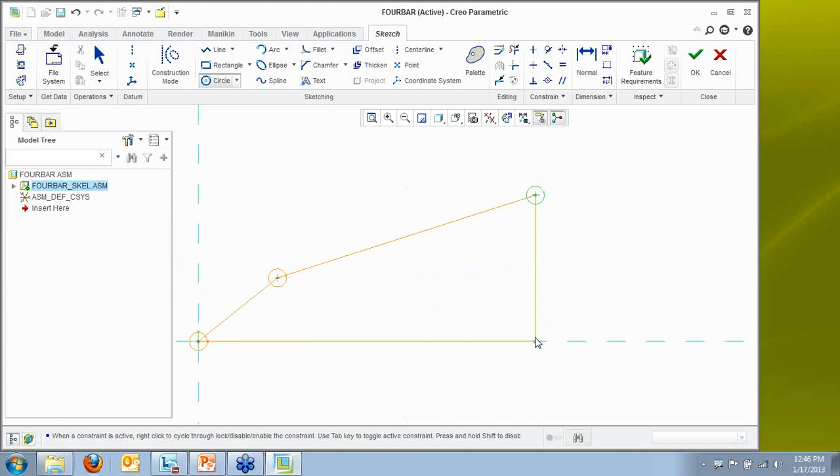One thing that's important when I'm doing mechanism connections inside of a motion skeleton, and I'm going to be putting circles at all the locations to define the holes for my linkages, I'm going to need to place 2 circles at every intersection, because I'm going to use one of those circles for each of these linkages. So notice I'm making lots of circles at the corners, and I'm snapping them all to the same radius.

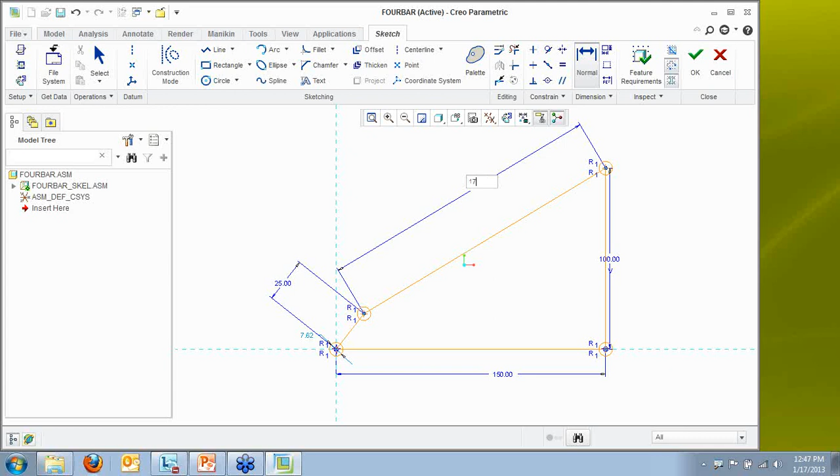And I'm going to say I want this side to be a nice round number. Nope, don't want to do that. Let's say 100, and we'll make this other link over here equal to 25. Make this one 150, and we will make this linkage up here 175. So now I've created my sketch. I'm going to click OK. Nothing special, just a sketch with some different circles on it.

However, I'm leaving this activated. I'm going to create the other components inside of here. So I'm going to create skeleton models, and instead of standard, I'm going to pick body for my motion skeleton. The first one we're going to call ground underscore SKEL. I'll click OK. And I'm going to copy from existing. I'm going to browse over to that millimeter kilogram second part file. And I'm going to click OK.

And I'm going to pick which part of this I want to be the ground portion. So I'm going to query select the bottom surface here, hold down Control, pick the circle on the left, the circle on the right, and I'm going to click OK. Notice at this point I've created a ground skeleton.prt. And let me turn off the coordinate systems as well to simplify my model tree. I'm going to come in and do that all the way around.

So I'm going to say skeleton model body. We're going to call this crank underscore SKEL. And this time I'm going to query select the left side here, hold down Control, pick the circle here. Because I've already picked one circle, there's only going to be one circle I can pick up here. And I'm going to go all the way around and do the same for all of these as well. So rocker 1 underscore SKEL.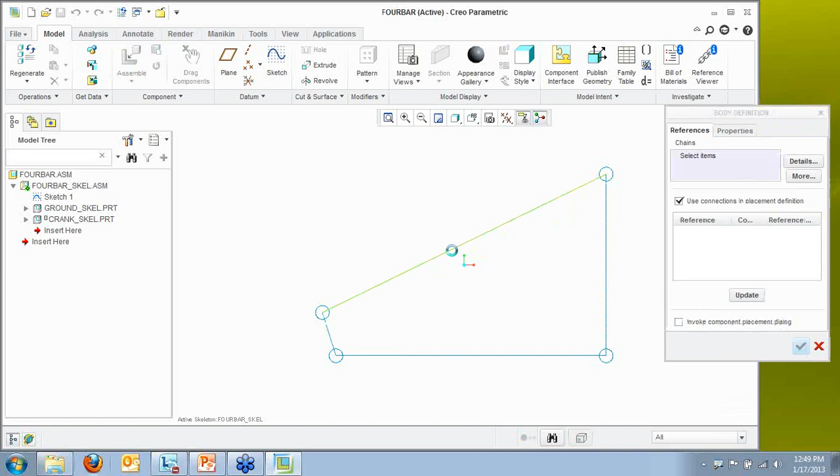Make sure that's a body. So rocker 1 underscore SKEL. Okay. I'm going to query select this top rocker link. I'm going to pick this link here. Notice I cannot pick the circle down here anymore. It's not highlighting because I've already selected both the circles there. I'm going to pick this circle over here. Then I'm going to do the same for the last component here.

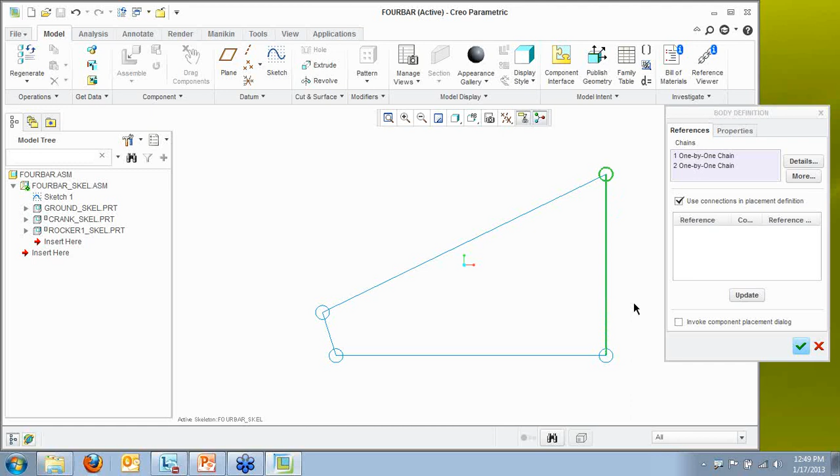So skeleton model, body, this one's rocker 2 underscore SKEL. Again, copy from existing. I'm going to query select this line here, and this line here. So right now I've got 4 skeletons. Well, there's still nothing special about them. I just basically took that sketch and broke it into 4 pieces. I need to go back and make mechanism constraints, which I could have done while I was creating this.

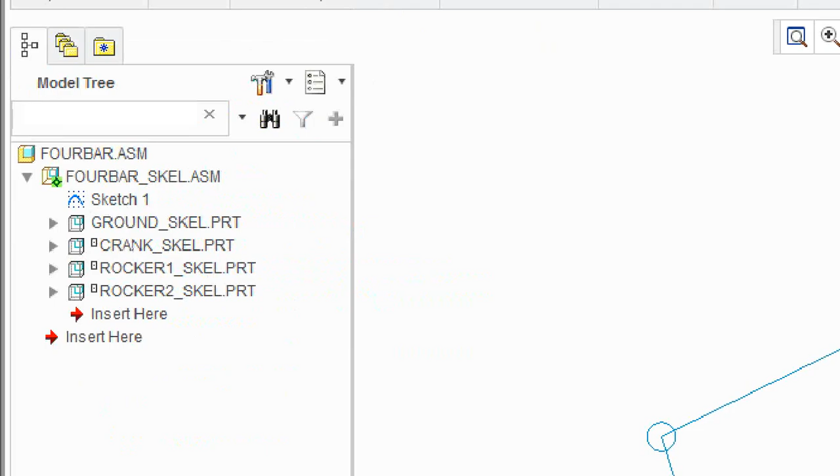And if you notice, let's zoom in on our model tree over here on the left. My ground skeleton is a standard skeleton. My crank, rocker 1, and rocker 2 skeletons are all actually packaged. So the first one, the ground skeleton, is fully constrained. However, the crank, rocker 1, and rocker 2 are all packaged. You can notice that by the little icon there.

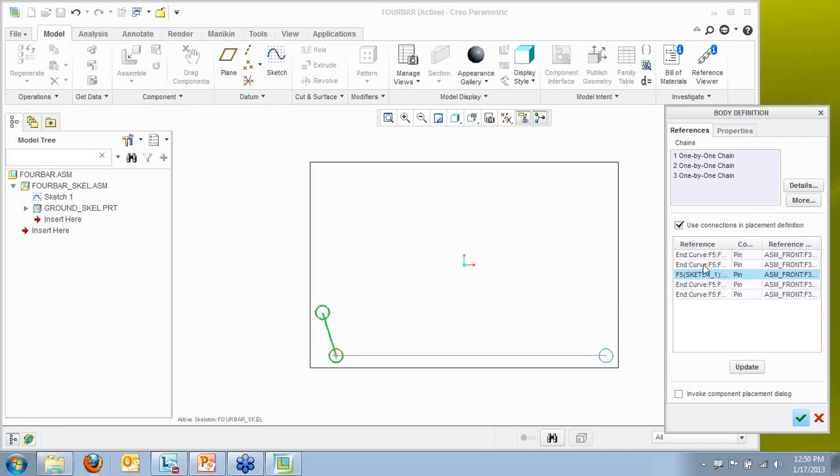So I'm going to edit the definition of this first crank skeleton here, and I'm going to click this update button here. It's going to give me a whole long list of lots of different references. I want to create a pin connection, so I don't want to create a bearing. I'm going to go ahead and delete that bearing connection. Then I'm going to click through here and find the one that gives me the references that I want for a pin connection. This one right here, the second one, is the one I want. So I can pick the other 4 and remove those. And now notice, if I hold down Control and Alt, I can drag that around like a mechanism.

Now I'm going to do the same with all the other ones. I'm going to grab the rocker 1, edit the definition, update, and this gives me quite a few references as well. I don't want that one, I want the second one. So I'm going to pick the final ones here, remove those as well. And then I'm going to do rocker 2, the same thing, edit definition, click update.

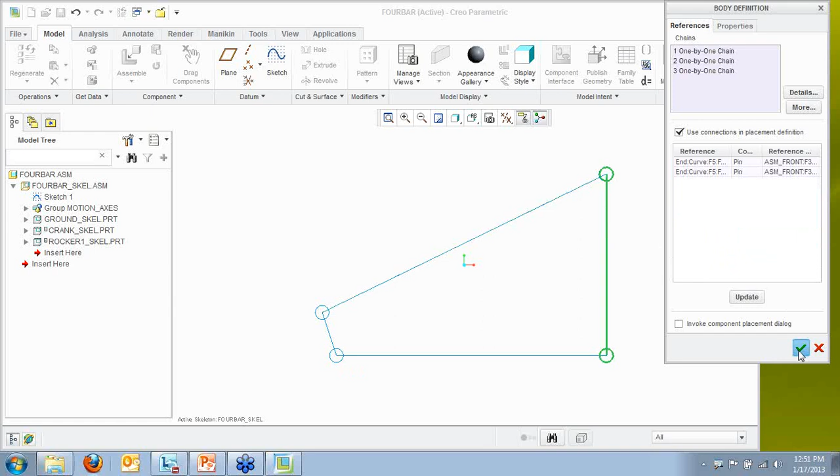Here I have quite a few more references than the other ones, so I'm going to pick through here. The second one's the one I want, so I'm going to remove the first one. I'm going to click through, second, third. Okay, so I want this one here as well, so remove this one, and then grab all the ones below here and remove these. And now that I've defined all my mechanism connections, I've got a working mechanism.

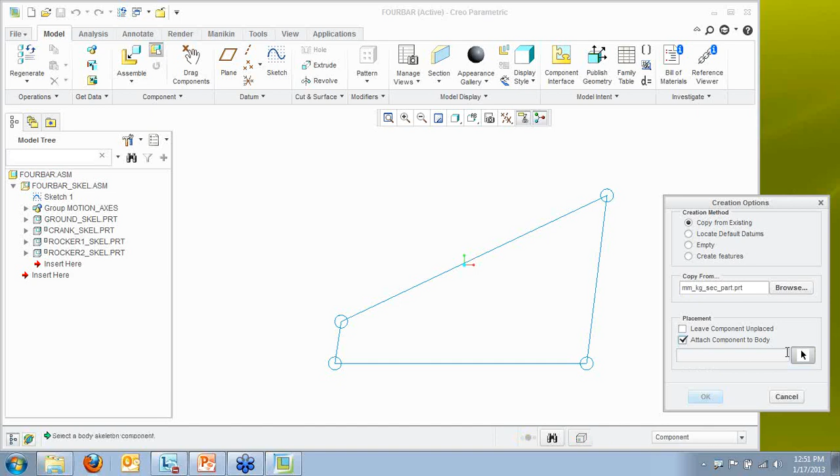So how do I actually turn this into real parts? Let's go back and activate our base assembly. I'm going to create another part, and I'm not going to pick skeleton model, but part, solid part. We'll start with rocker 2, and click OK. And notice, because of the method I've been using to create this, I have a couple other placement options down here. Not only leave component unplaced, but I have attach component to body. I'm going to pick this rocker 2 mechanism component, and click OK. Note that rocker 2 is now attached to this.

If I go in and, I'm sorry, not edit the definition, actually open rocker 2 in its own window, you'll notice that the sketch comes in. So let's go to our front view here. The actual sketch of the skeleton part came into the part using an external merge feature.

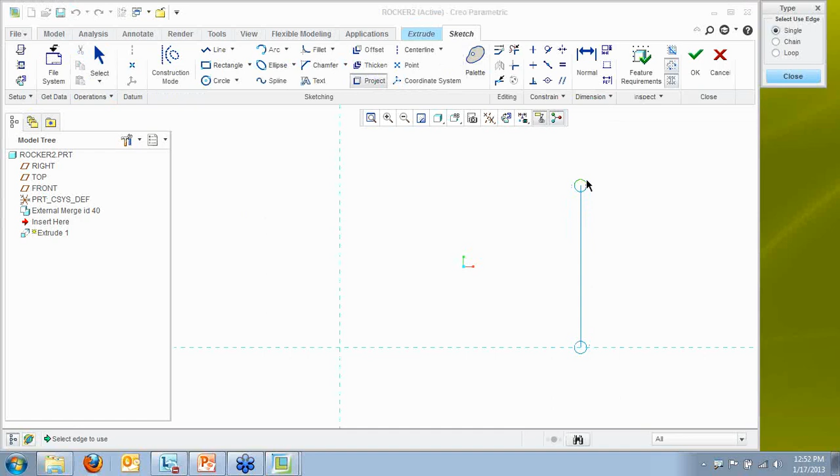Now I'm going to create an extrude on the front plane, and I'm going to use my project to grab different components here, and then I'm going to grab my circle tool and make another circle here and a circle down here. And then I'm going to use my line tangent tool to put the sides of my linkage on real quickly and easily. Then I use my trim tool to trim out a couple of little sections here. Now, one of the cool things about Creo now, I get a shaded view automatically telling me where that's going to be.

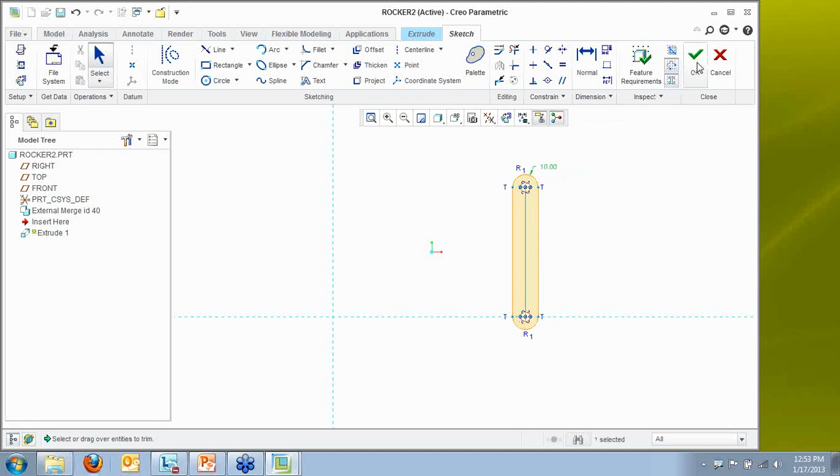Let's change our dimensions ever so slightly. And then I want to give it a thickness of 5. Complete my extrude. Save the feature. Close it.

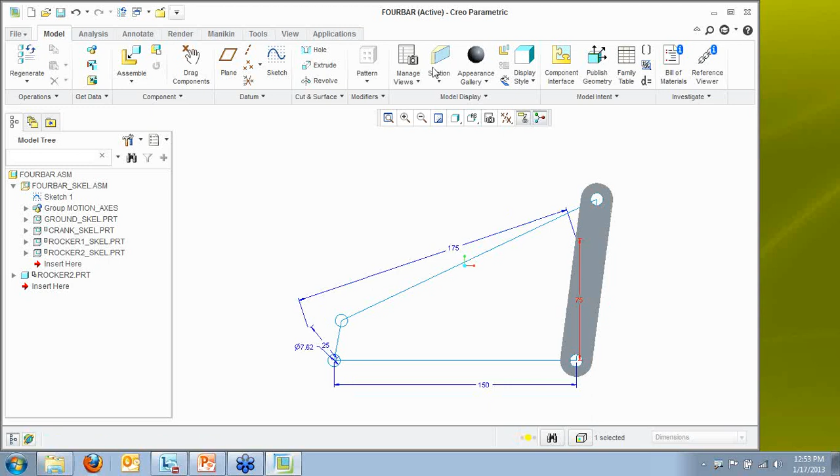And now notice I have a mechanism associated. I have one of the components of my mechanism that's created. Just like before, if I come into this existing sketch and I edit this sketch and I change this from 100 to, let's say, 75, and then I regenerate, you'll notice that my solid does update appropriately so that now I've got, again, a working mechanism.

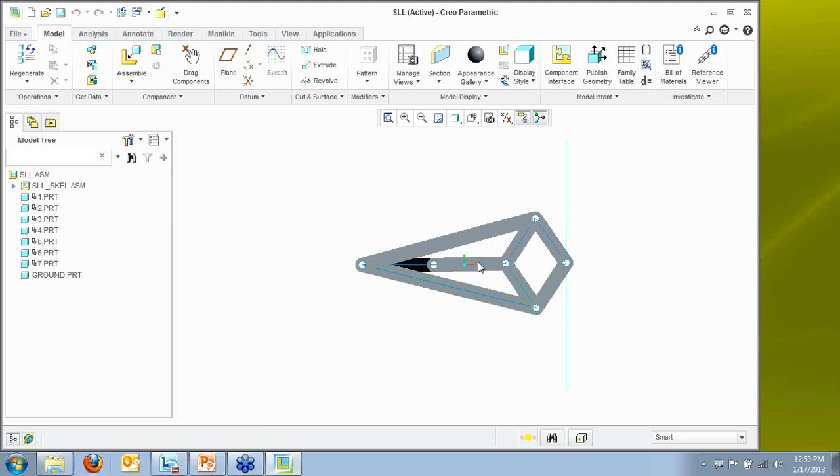Now, why would you want to use this? Well, I've got a really cool little example here, and I'll just show this to you really quick. Inside my motion skeleton, I've got a cool little mechanism I built really quickly yesterday. A straight line mechanism. If you guys have ever seen one of these before, it's, in this case, an 8-bar mechanism. The ground counts as the 8th bar that allows the output of the mechanism to draw a perfectly straight line. So this has been around since the 1860s or so when this was designed, but one of those cool little kinematic wonders that you see from time to time.

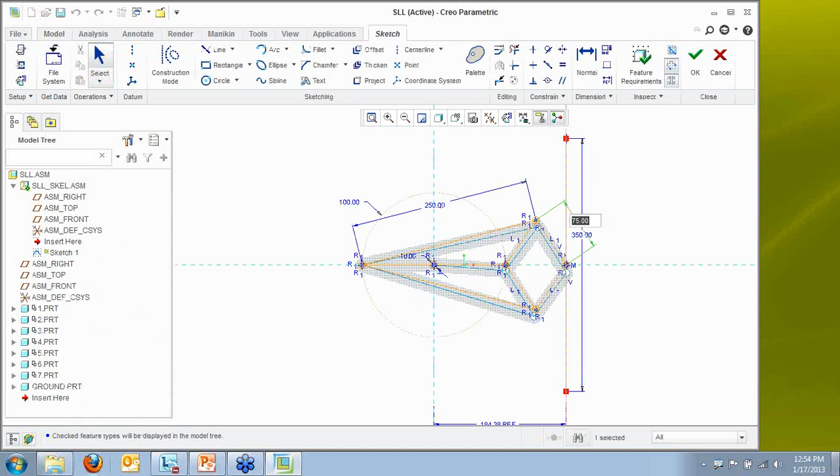And I created this entire thing using that motion skeleton. I've got my ground skeleton, all my linkages here. Let's turn on my tree filters here. I've got one sketch that drives the entire thing. So if I edit the definition of a sketch, you can see there's my sketch. And then I can come back and modify, let's say, from 75 to 80. No, that's not enough. We'll modify this to 100. And then click OK, regenerate, and you can see that my mechanism drastically differs.

So this allows us real quickly and easily to make pretty complicated mechanisms and have them defined off of very simple sketches without having to go in and define the location of each of these components separately.